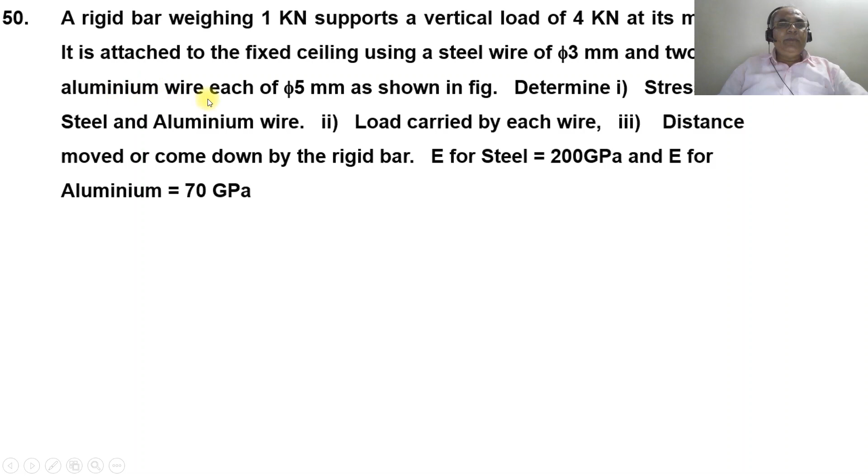Now, in this video, we are going to discuss a problem on a composite bar. The problem reads: a rigid bar weighing 1 kilonewton supports a vertical load of 4 kilonewton at its midpoint. It is attached to the fixed ceiling using a steel wire of diameter 3 mm and two aluminum wires, each of 5 mm, as shown in the figure.

So the figure is here, wherein you have three vertical bars, one of steel and the other two of aluminum. The steel wire has a diameter of 3 mm and a length of 800 mm, and the two aluminum wires, this one and this, have a length of 500 mm and a diameter of 5 mm.

So what are all the things we need to find out? We need to find the stress in the steel and aluminum wires, the load carried by each wire, and also the distance moved by the rigid bar, which is going to come down due to the application of load. The Young's modulus for steel is 200 GPa and for aluminum is 70 GPa. So this is the problem given to you, and we need to solve it.

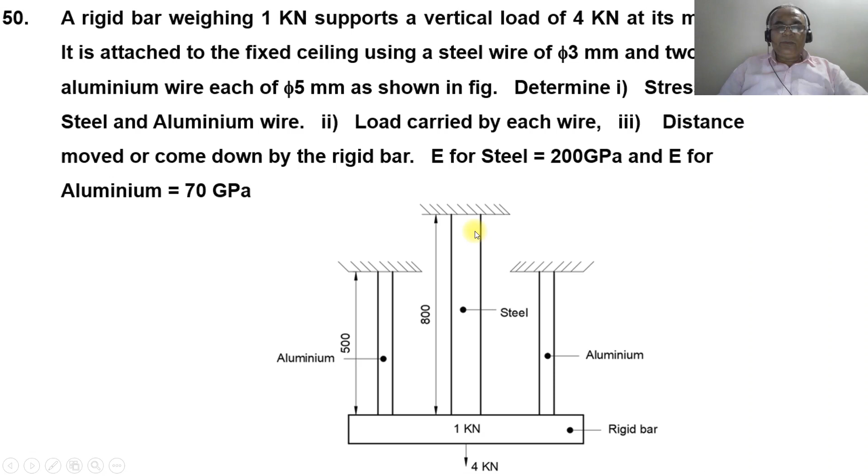So first we are going to consider the data. The diameter of the steel wire is 3 mm and the diameter of the aluminum wire is 5 mm, the length of the steel wire is 800 mm and the length of the aluminum wire is 500 mm. The Young's modulus of steel is 200 into 10 to the power of 3, which is 200 GPa, and the Young's modulus of aluminum is 70 into 10 to the power of 3 Newton per mm square.

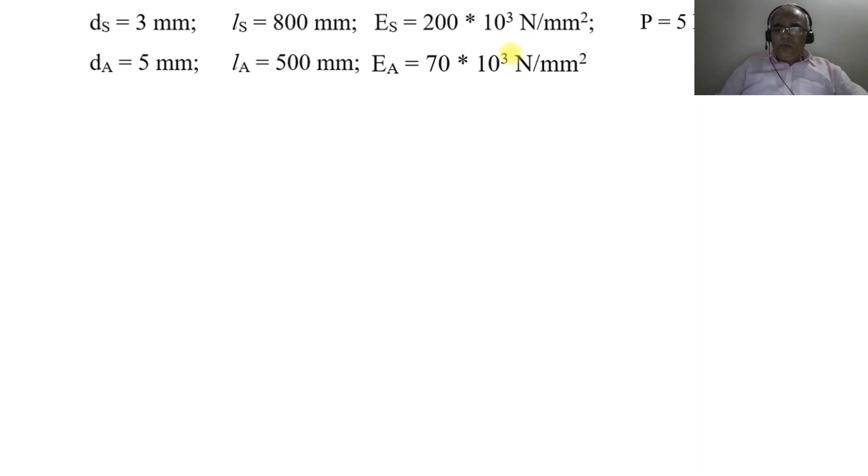Also the load is 5 kilonewton, which is the 4 kilonewton applied at the midpoint plus the load of the rigid plate; both act downwards. Since it is acting downwards, naturally it's positive because it is a tensile load. So now we will consider how to find the stresses in the steel and aluminum wires.

First, the condition is that the total load on the bar equals the load on the steel wire plus the load carried by each outer aluminum wire. Let us assume PS is the load carried by the steel wire, PA is the load carried by the aluminum wire, and capital P is the total load. The total load P is the load acting at the midpoint plus the load of the rigid plate, which is 1 plus 4, giving 5 kilonewton, which is 5000 Newton.

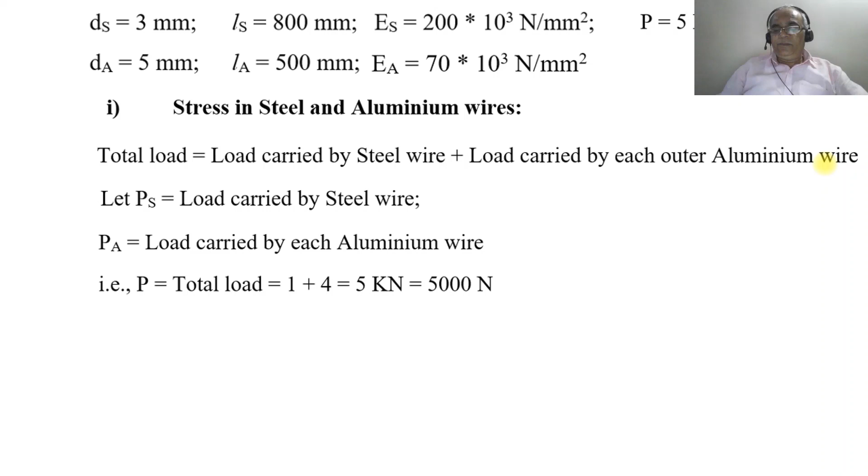So what is the condition here? Since PS is the load carried by the steel wire and PA by the aluminum wire, and you have two aluminum wires and one steel wire, the loads add up to the total load P. By symmetry, the outer aluminum wires carry equal loads. So PS plus 2PA is equal to P, which is 5 into 10 to the power of 3, or 5000 Newton.

Now we are going to substitute the value of PS. Stress is nothing but the load by the area of cross section. So we substitute PS as sigma S into A, because sigma is equal to P by A, so P is equal to sigma into A, which is the general formula.

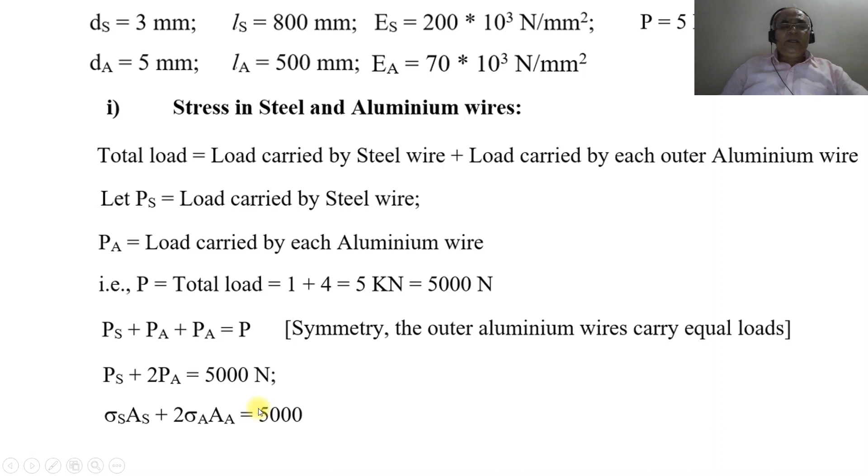For the load carried by the steel wire, it is the stress in the steel wire into the area of cross section of the steel wire, plus 2 into the load carried by the aluminum wire, which is the stress of aluminum into the area of cross section of aluminum. That will be equal to 5000 Newton. Now we substitute: sigma S, the stress on the steel wire, multiplied by the area of cross section.

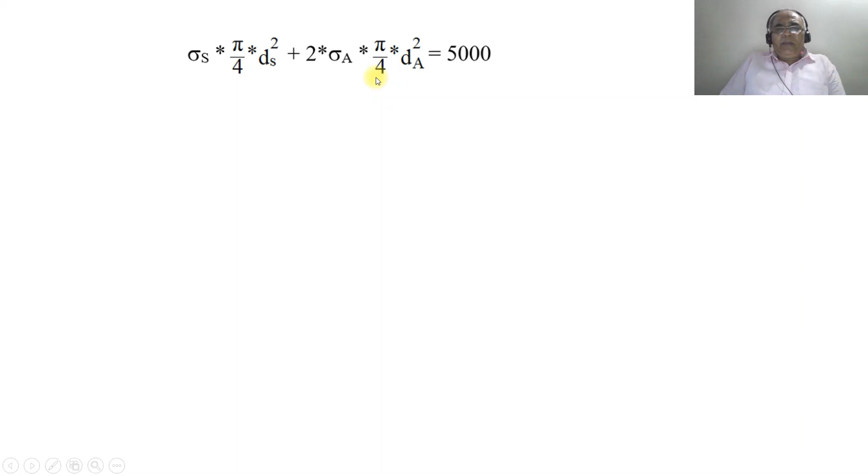Since the diameter is given, the area of the circle is pi by 4 into d square, plus 2 into sigma A into AA, where the area of cross section of the aluminum wire is again pi by 4 into dA square, which is equal to 5000 Newton. Now substitute the values of dS and dA in the equation.

So sigma S into pi by 4 into 3 square plus 2 into sigma A into pi by 4 into 5 square. You can take pi by 4 as the common factor, giving sigma S into 3 square plus 2 sigma A into 5 square, equal to 5000. Once you take pi by 4 out, the 4 is cross multiplied to the numerator and pi to the denominator.

Therefore, in this equation, you get sigma S into 3 square plus 2 sigma A into 5 square, which is equal to 5000 into 4 by pi. Now, on simplification, when you expand this, 3 square becomes 9.

9 into sigma S plus 25. 5 square is 25, into 2 is 50, into sigma A. On simplification, this term we are going to get as 6366.2.

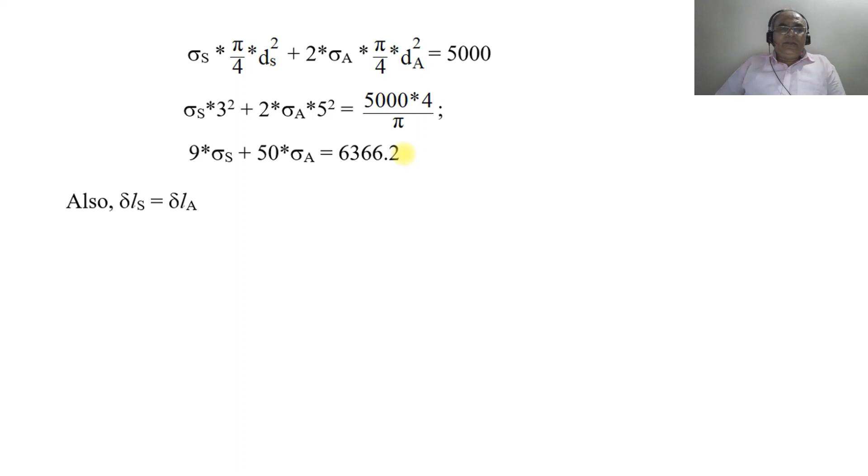Now we also know the deformation in the steel bar is equal to the deformation in the aluminum bar, assuming that the bar remains horizontal even after the stretching. So what is delta L? The delta L formula is the general equation, which is P into L by A into E.

Since it is the deformation of the steel wire, we are going to consider P into L by A into E as PS into LS by AS into ES. That is what we have written here, PS into LS by AS into ES. That will be equal to the deformation in the aluminum wire, which is PA into LA by AA into EA.

But we know PS by AS as sigma S, which is the stress, per the definition. So sigma S into LS by ES is equal to sigma A into LA by EA. So what we have done is express PS by AS in terms of sigma S into LS by ES, that is equal to PA by AA, which is nothing but sigma A into LA by EA for the aluminum wire.

Now you substitute the values of the length of the steel wire, which is 800, and the Young's modulus of the steel wire as 200 into 10 to the power of 3, and also the length of the aluminum wire, which is 500, and the Young's modulus of the aluminum wire, which is 70 into 10 to the power of 3. On simplification, you will get sigma A equal to 0.56 into sigma S.

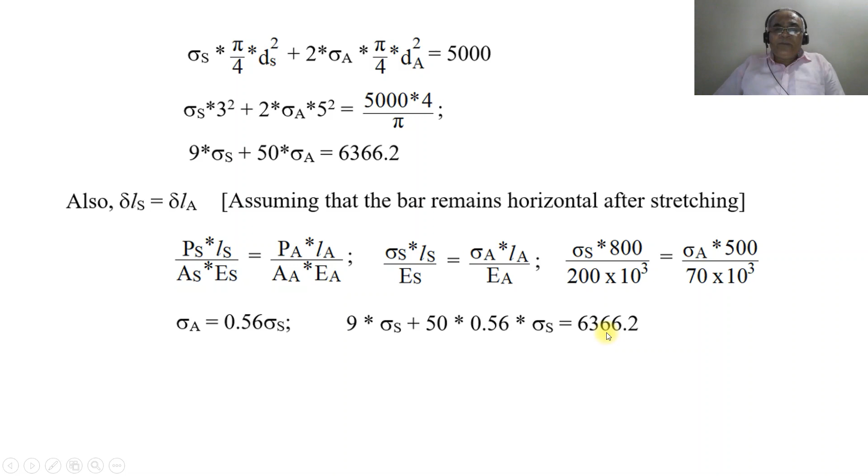Now you substitute the value of sigma A as 0.56 into sigma S in this particular equation. So 9 sigma S plus 50 into 0.56 into sigma S is equal to 6366.2. On simplification, the stress in the steel wire, sigma S, will be equal to 172.06 Newton per mm square. The stress is always load by the area of cross section; the load is in Newton and the area of cross section in mm square.

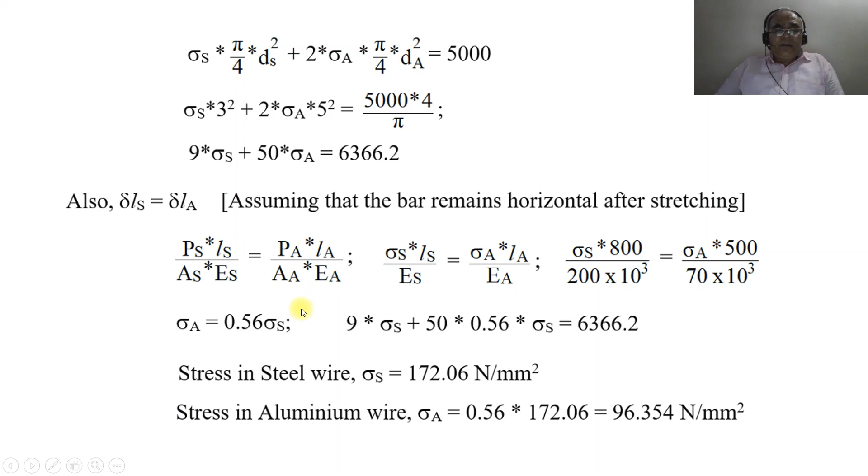Similarly, we are going to calculate the stress in the aluminum wire, which is 0.56 into sigma S. You substitute the value of sigma S as 172.06, and 0.56 is the constant. So 0.56 into 172.06 will be equal to 96.354 Newton per mm square.

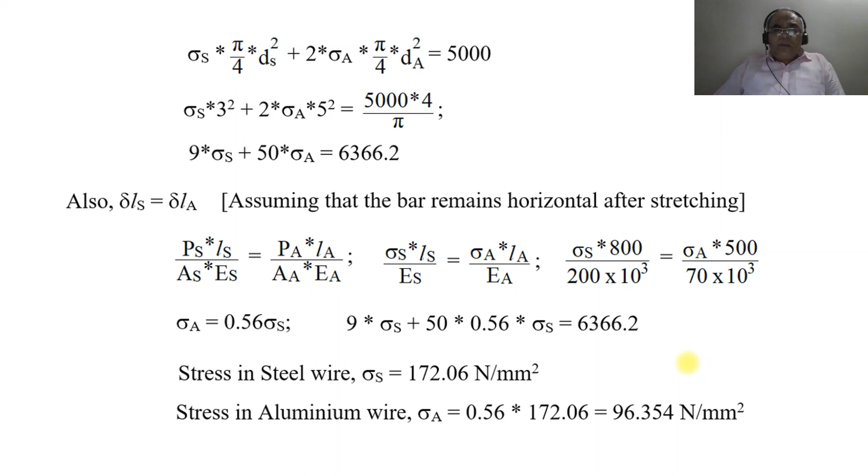Then the load carried by each wire: one is the load carried by the steel wire, and the other the load carried by the aluminum wire. The load carried by the steel wire, PS, is equal to sigma S into AS. You know sigma S is 172.06, and the steel wire diameter is 3 mm.

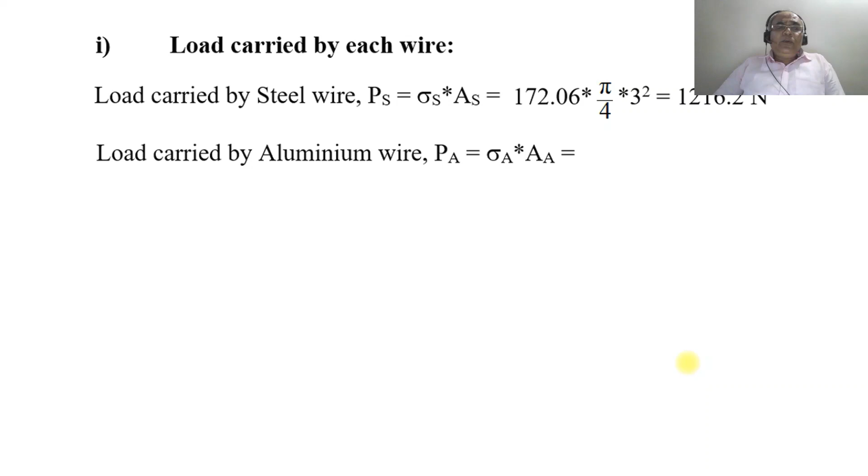So 172.06 into the area of steel cross section, which is pi by 4 into 3 square, since the cross-sectional area is in terms of diameter and the diameter of the steel wire is 3. Therefore, 172.06 into pi by 4 into 3 square, on simplification, gives 1216.2 Newton.

Similarly, the load carried by the aluminium wire, PA, is equal to sigma A into AA. Here we have 96.354, the stress in the aluminium wire, multiplied by the cross-sectional area of the aluminium wire, with diameter 5. So 96.354 into pi by 4 into 5 square, which will be equal to 1891.9 Newton.

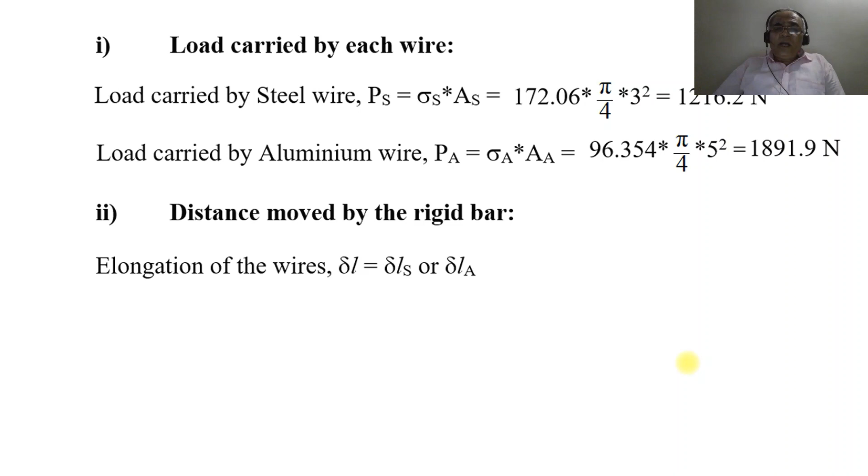Then we have the distance moved by the rigid bar, that is, the deformation of the rigid bar, given by the elongation of the wire. Since it is a tensile load acting, the bar has to come down, so we get the elongation of the wires, delta L. You can use the formula for delta L of either the steel wire or the aluminium wire.

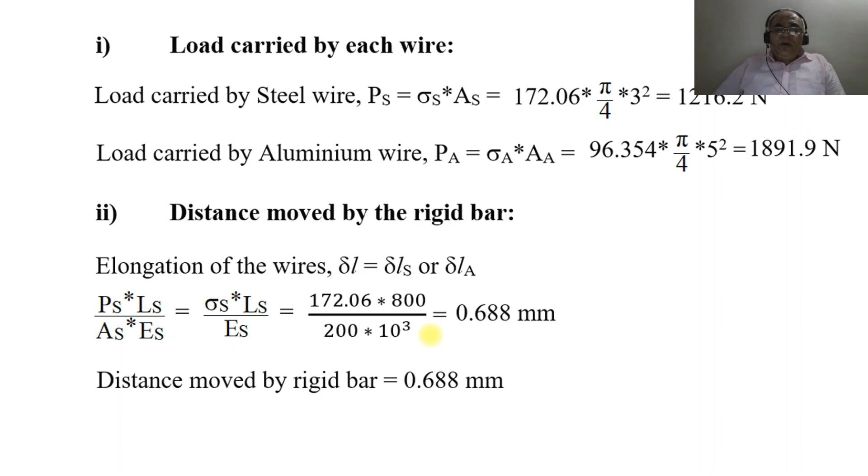So PS into LS by AS into ES, which is sigma S into LS by ES. Substituting sigma S as 172.06, the length of the steel wire as 800, divided by the Young's modulus of the steel wire, 200 into 10 to the power of 3, we get 0.688 mm. So the distance moved by the rigid bar will be 0.688 mm. This is how you will be able to solve this problem. Thank you.